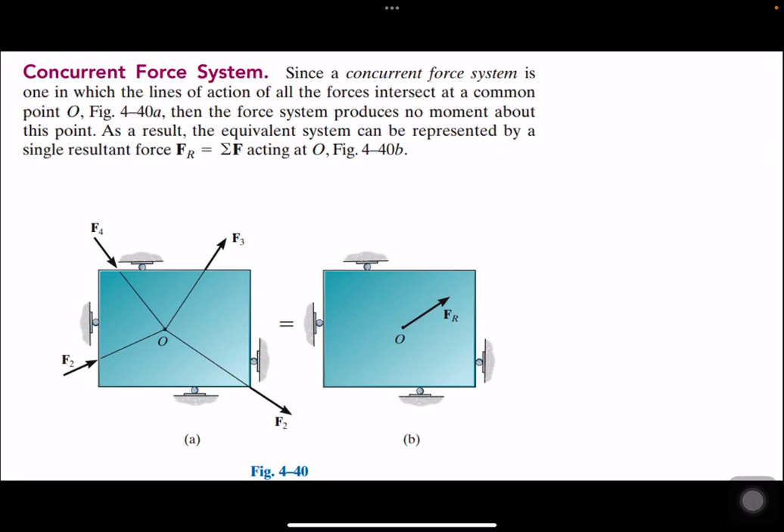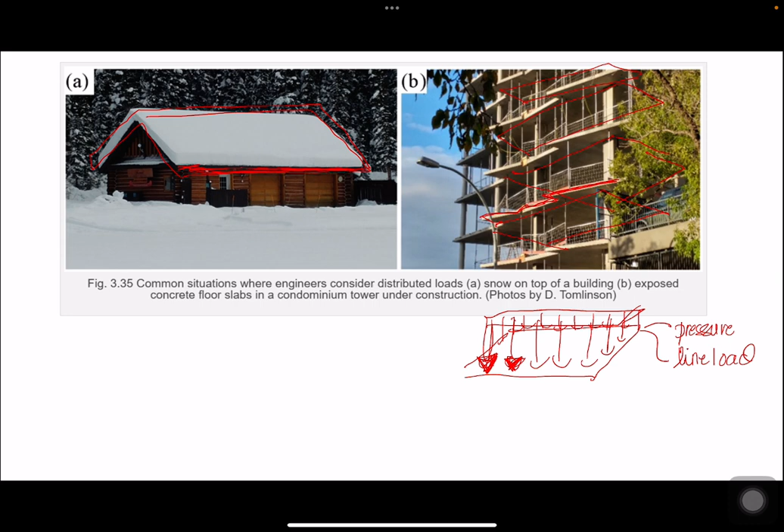So we simplified coplanar force systems, we also simplified parallel force systems, no? So this time, if we have a distributed load, is there a way for us to reduce this distributed load? So is there a way? Okay? So of course, there's a way.

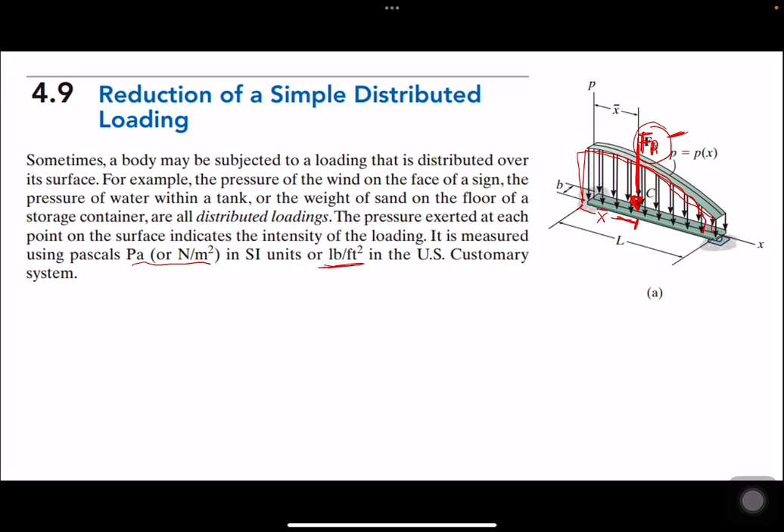Okay, so you have here yung unit ng pressure, so Pascal or Newton per square meter. We also have pound per square foot. Okay, so na-mention na yan kanina.

Now, the most common type of distributed loading daw encountered in engineering practice is generally uniform along a single axis. Okay. For example, meron tayong beam or plate. So, this is our beam or plate. So, as you can see, meron siyang length na L and constant width na B.

So, this beam is subjected to a pressure loading as seen in this figure. So, this pressure loading, as you can see, nagva-vary lang siya along X. So, medyo high ang intensity dito and then lumiliit na siya. But in terms of this axis, no? Constant yung pressure distribution natin. So, hindi siya nag-change naman. Kasi mahirap na if dalawang axis varying yung intensity natin.

So, in this case, uniform siya in this axis, yung pressure distribution, while in the x-axis, it varies. Okay, so this is uniform loading along a single axis. So, itong loading na to, pwede siyang i-describe in terms of pressure. So, you can describe that one as P. Yung P natin, yung intensity niya is an expression in terms of X kasi nagva-vary siya along X. So, unit will be, let's say, Newton per square meter. So, it contains only one variable X. And for this reason, we can also represent it as a coplanar distributed load.

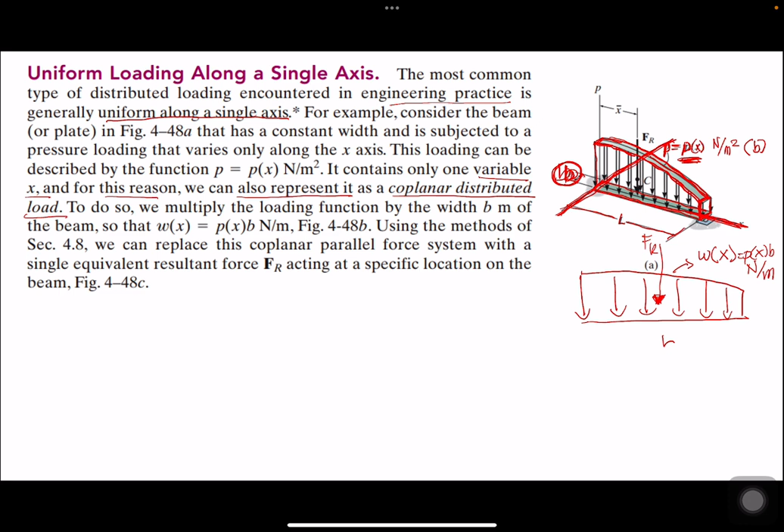So, since naging coplanar na siya, coplanar distributed load, so we can easily reduce this one into a resultant force acting at a specified location on the beam. So, paano ba daw makuha yung magnitude of the resultant force sa isang distributed loading? Now, marami itong sinasabi, no? But let's jump to the conclusion. Paano ba?

The magnitude daw of the resultant force is actually equal to the total area under the loading diagram. Okay, so the magnitude of the resultant force is equal to the total area under the loading diagram. So if our load is ganito, varying siya, no? Varying. So, we actually need a little bit of calculus here para makuha yung area nito.

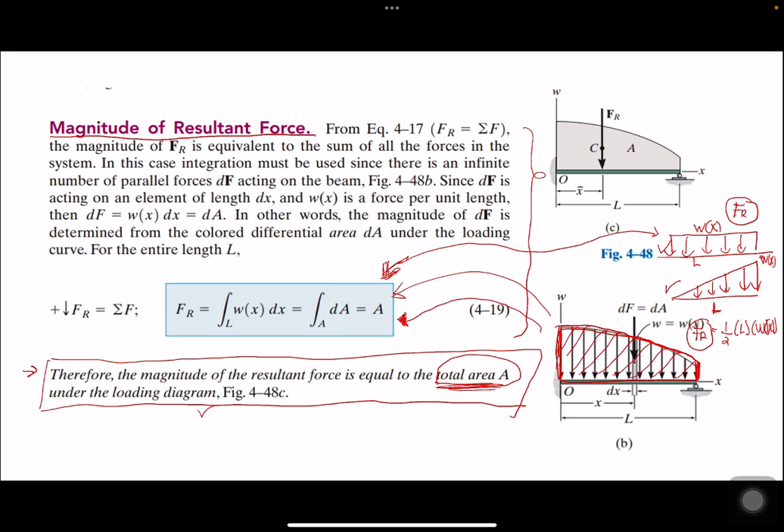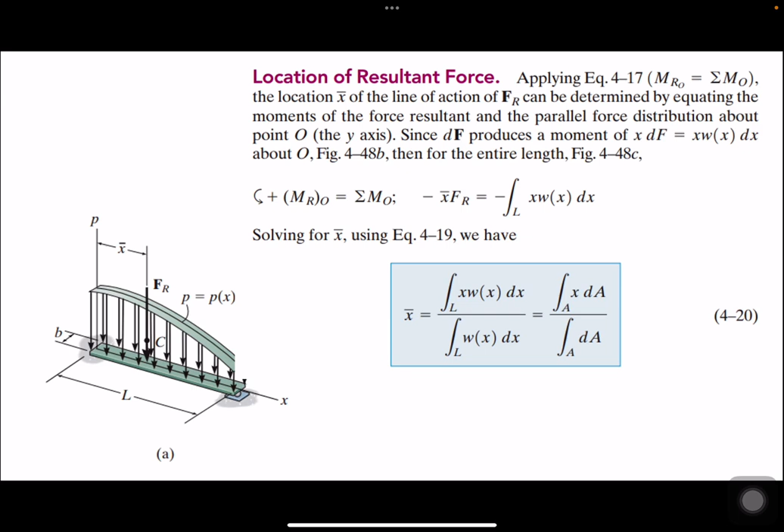Now, saan naman malolocate yung resultant force? Where is the location of the resultant force? So, dito na tayo pumunta. Yung resultant force daw natin has a magnitude equal to the volume under the loading curve and a line of action which passes through the centroid of this volume. So actually, ang sinabi dito is volume, no?

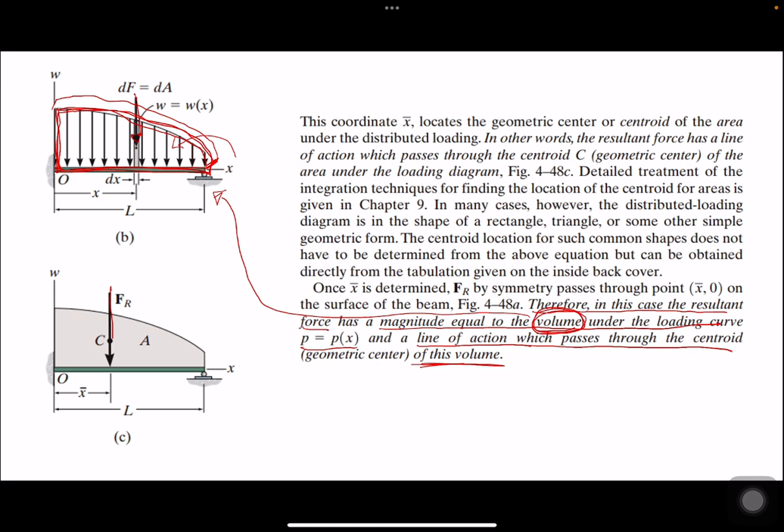So ang ginawa natin kanina sa discussion is before natin kunin yung area ng loading, given the pressure, na-multiply na natin siya sa width para maging coplanar force system na lang yung meron tayo. Then after having this coplanar force system, kukunin natin yung area, yun yung resultant. Diba? Then yung resultant na nakuha natin, meron siyang line of action na dumadaan sa centroid of the load diagram. So doon natin ma-determine yung location ng FR kasi always siyang dumadaan sa centroid ng load diagram natin.

So the centroid, it's actually the geometric center of the body. Geometric center. So again, if you're dealing with rectangular or uniformly distributed loadings, alam natin paano makuha yung resultant force kasi area lang ng rectangle. And yung centroid naman, simple lang yan, it's the midpoint. So if this is L, the centroid is L over 2. So if this is our point O, ang FR natin is located L over 2 from point O.

How about the triangular na distributed load? Ganito. Alam din natin paano kunin yung resultant niya, which is just the area. So you have FR, and that will be passing through the centroid or geometric center of the load diagram. So for a triangle, the centroid will be 2/3 of the length from the centroid papunta sa sharp edge ng triangle or the zero intensity. Then from the centroid papunta sa pinaka height ng triangle, that is 1/3 of L, if this is L.

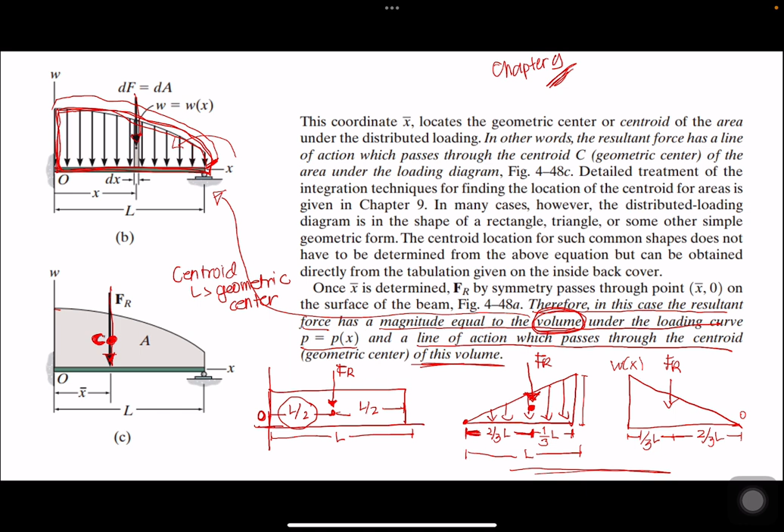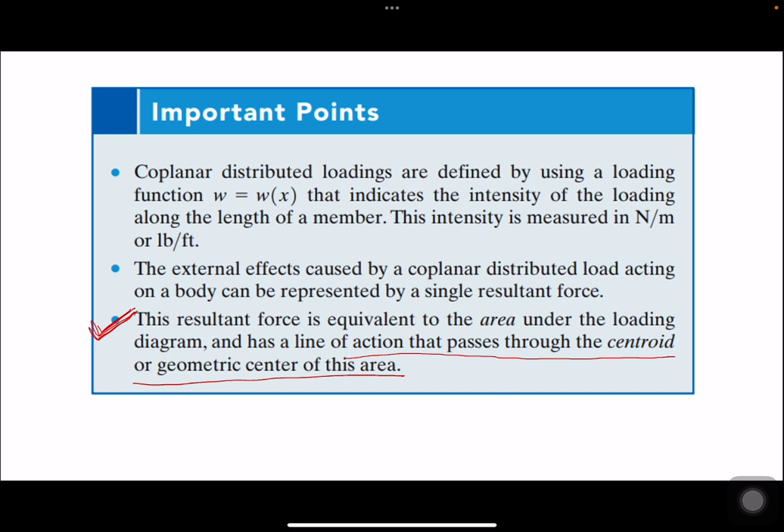So meron tayong chapters na nakalaan talaga in calculating the centroid of a body. Check ko lang. Oh yes, sa chapter 9, center of gravity and centroid. So this time bigyan na kayo ng introduction sa centroid, basic lang kasi mga triangle and rectangles lang. Again, the resultant force is equivalent to the area under the loading diagram and has a line of action passing through the centroid or geometric center of this area. So let's have an example. We have a distributed loading